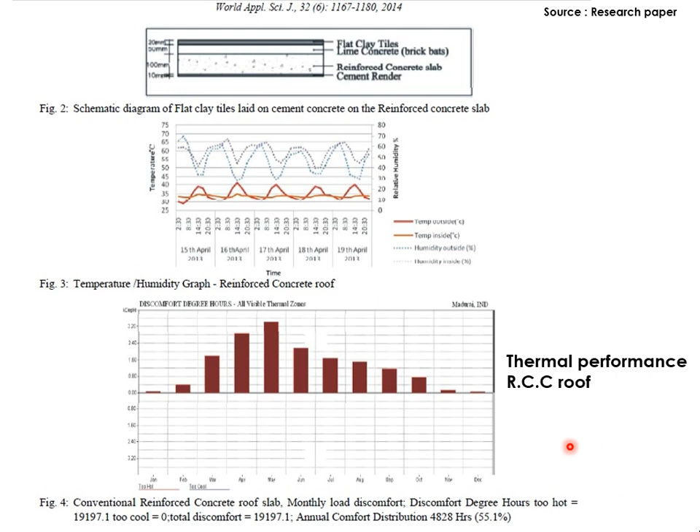So now we have to go through the various roof structures and find out which roof performs better in certain climates, that is, at Madurai.

The second configuration is the Madras terrace roof, a very old type of construction which you should have already encountered during your village study or in your first year. It has a wooden beam, then a wooden rafter, then brickwork or blockwork with lime mortar, then again a small brickwork, finished with a terracotta tile on top. It's a very thick roof.

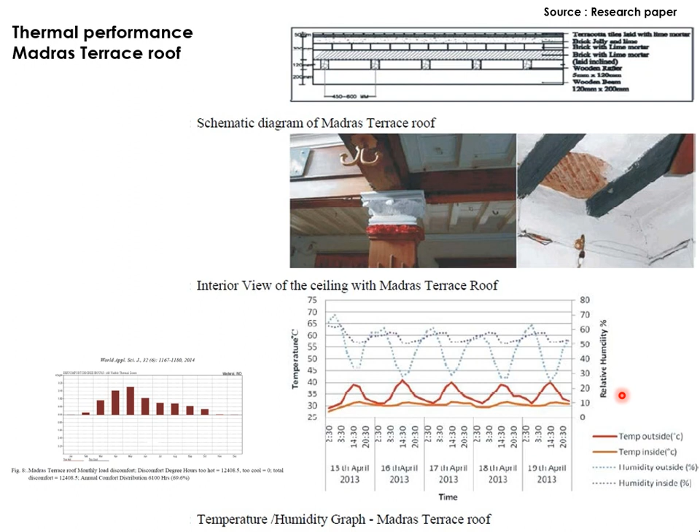The Madras terrace roof also has certain temperature fluctuations because of the exposure to the sun. That is one part you can understand.

The next one is the filler slab. Again, the filler slab is filled with Mangalore tiles - it's an RCC slab, and the bottom of the slab is done with Mangalore tiles. This is the view of the filler slab. So the filler slab is also taken care of, and measurements are taken with this construction too.

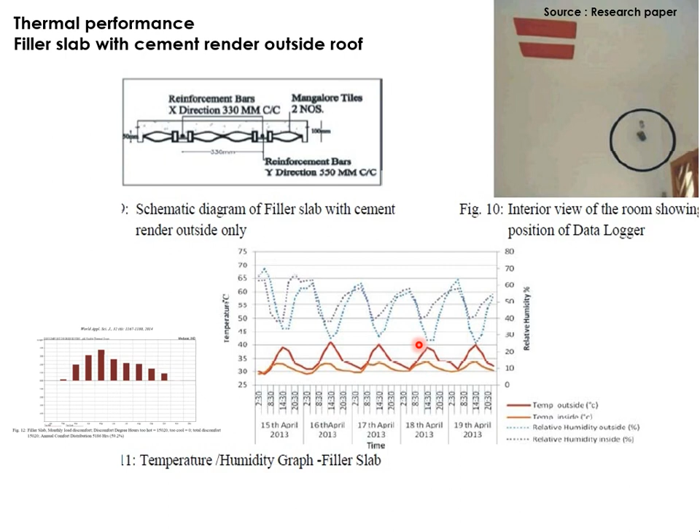We have the thatched roof, one of the oldest roof structures - a vernacular structure where people used to live in thatched houses in villages. So the thatched roof is also considered.

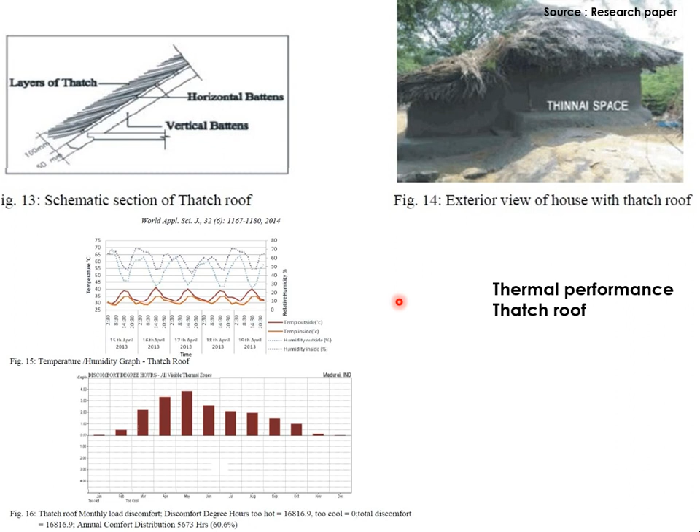Then we have an earthen pot roof, which you are going to be newly exposed to. It's an older type of construction using inverted earthen pots with a hollow section. Because of the earth pot, the heat gain will be a little lesser, and it will be very effective during summers since it is on the roof. After this, it is actually covered - the earthen pots are covered.

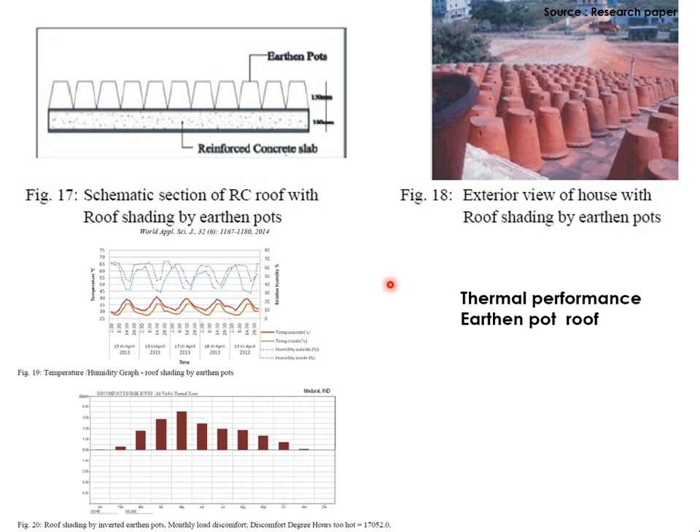You can see what type of results or temperature fluctuations are seen because of this roof structure. Then we have another, slightly inclined roof, the Mangalore tile roof, which is also a vernacular structure, and it is also considered.

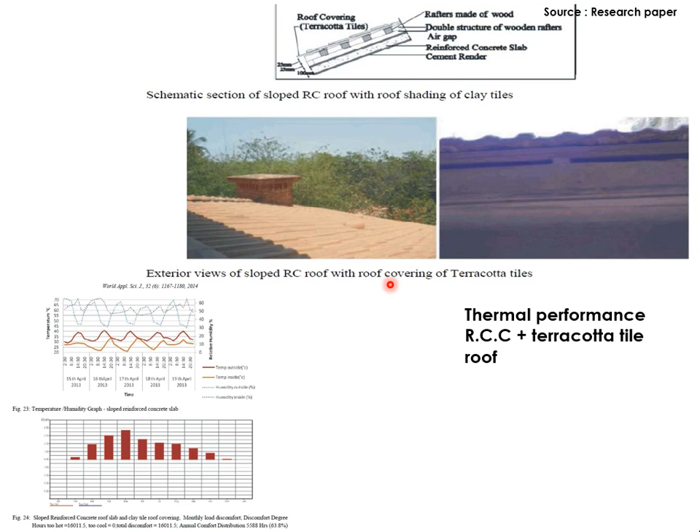Taking the overall picture, you can understand the temperature fluctuations or temperature minimization inside the building because of these roof structures. The blue dotted line represents the outside air temperature.

The outside air temperature from 15th April to 19th April is almost touching 38 degrees, one day touching 42 degrees, another going to touch something like 40 degrees. So the air temperature is extremely high, and we have to understand what is the air temperature inside the building.

When you come inside the building, the roof is going to give you results of heat reduction or heat gain. If you see the RCC roof, the flat roof which we use, called reinforced concrete roof, it is not performing very nicely. During the daytime it's almost 35 degrees Celsius, but during the night time also there is heat gain because it has already gained the heat.

So you can see the fluctuations here. In the daytime it is reducing, but at night the temperature inside the room is not reduced because of the RCC structure.

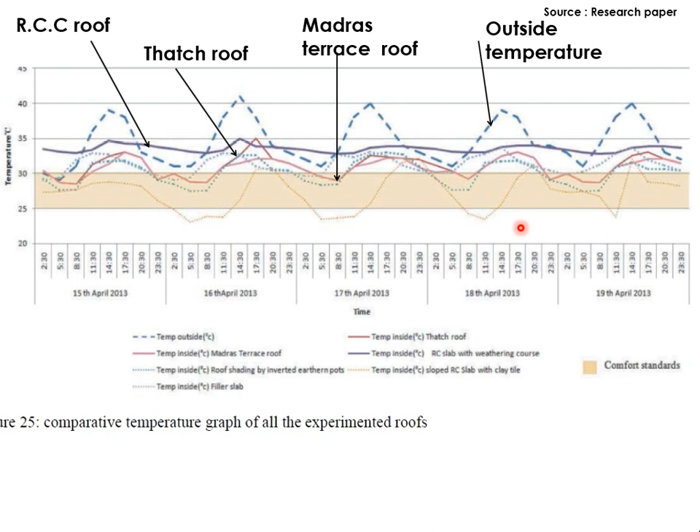The next thing is the filler slab, which is also performing very nicely, better than all the other structures. These roof configurations have been studied by certain researchers, and we understand that the filler slab, or the sloped RCC slab with clay tile, is also performing better. So this is a perfect comparison of how the roof structure can be an identity to reduce thermal comfort gain.

The next thing is glass, a very important element in a building. We know the wall is important, the roof is important, and then we have the fenestrations, the window openings. There is a lot of opening in the building to get daylight, but the same openings become a contributing factor for heat gain because of the glazing structure.

With glazing, we generally have clear glass recommended in residential sections. We have short wave radiation, called solar radiation. Some amount of heat is reflected, some is transmitted inside the building, and some is absorbed by the glass structure.

So this is outside the building, this is inside the building. Heat is reflected, heat is transmitted, and heat is also absorbed. So we have it as A plus R plus T is equal to 1.

We saw in the previous chapter the absorptivity and reflectivity of any material, so A plus R is equal to 1. Now in the glass we have A plus R plus T is equal to 1. So a part of it is reflected, part of it is absorbed, etc. And the whole gain of heat depends on the roof and also the glass material.

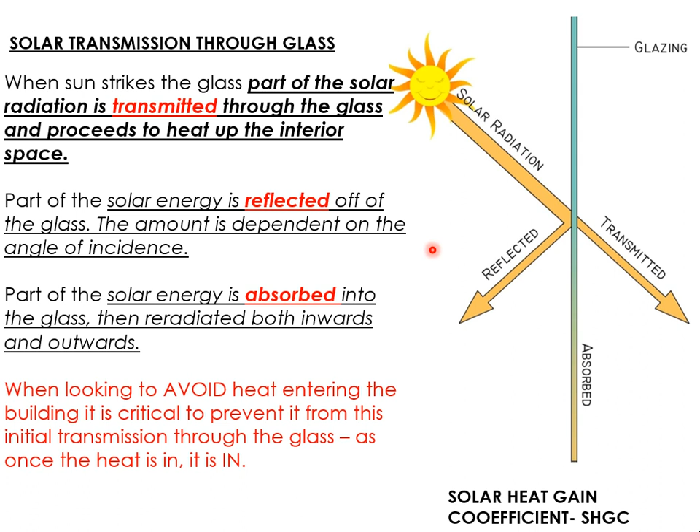So we have three types of glasses: one is clear glass, one is heat absorbing glass, and we have reflective glass. Of course, there are a lot of modules of glass, like a curtain wall section, double wall, double glass, triple pane glass, and some kind of low emissivity glass, etc. In the forthcoming chapters, you can read about those glass sections.

If you have a clear glass, generally we use clear glass in most residential sections. For clear glass, almost 8% is reflected, and 87% of heat is transmitted. For the heat absorbing glass, 43% of heat is transmitted and 8% is reflected. For the reflective glass, also called tinted glass, we have 34% reflected and 30% transmitted.

According to the glass thickness, the glass property, and the tint or color of the glass, the heat absorption varies. So if you see, the heat gain is very high in clear glass. When you recommend a clear glass, it's better to recommend it along with shading elements, etc. That is very important.

Then we have the heat gain which is lesser in the heat absorbing glass, and the heat gain is very less in reflective glass. But the disadvantage is the light level becomes a little lesser because of the reflective coating. So we have to consider the location we are proposing, the type of room, and whether we need more daylight or more heat gain, and accordingly we can propose the glass type.

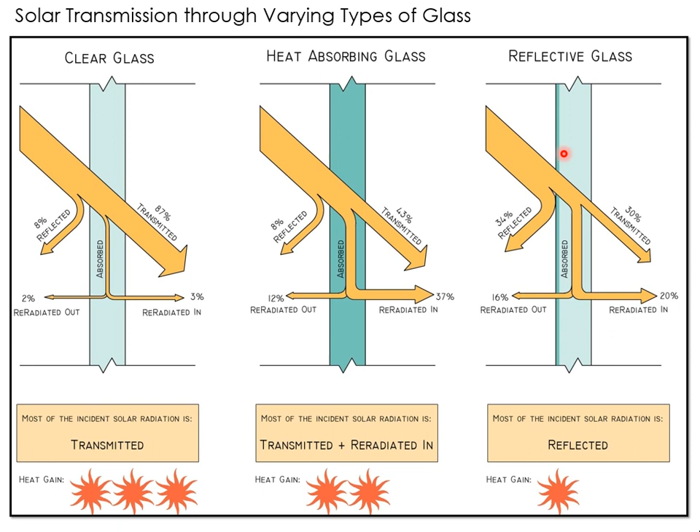So we can see in the forthcoming chapters about the design proposals according to the climates.

Next is the shading strategies, which is very important. According to the hemisphere and latitude, we must know how the sun path is, and accordingly we have to recommend the shading. Shading strategies can be recommended on the wall, on the roof sections, etc. We will understand about these one by one.

Generally we are in the northern hemisphere, so we consider the northern hemispherical sections. The sun path is from east to west along the south, so it's tilted along the south. During December or winter season, the sun is almost inclined to 12 to 20 degrees, so you get more exposure to the southern wall. During summer, the sun is almost at zenith angle, so you get more exposure to the roof section.

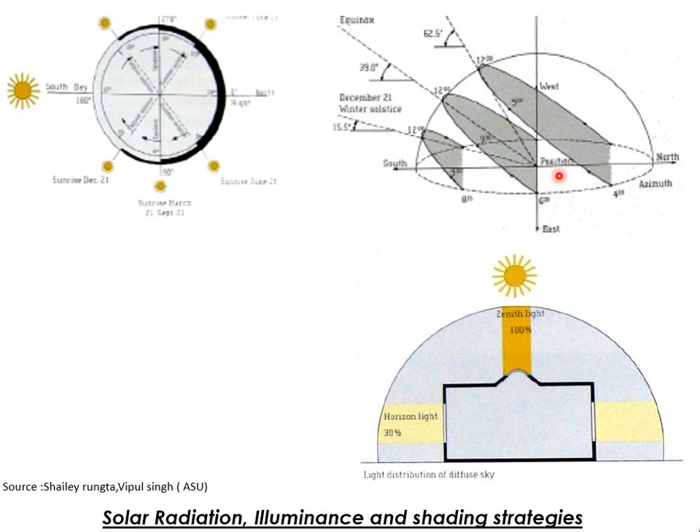For a northern hemisphere, something like Tamil Nadu or New Delhi or anywhere in the northern hemisphere - during winter sun, for example during December, January, or November, December and January, your sun is inclined towards the south. So your southern facade is actually more exposed. You must understand how to protect your southern facade or how to gain heat from it if it's a very cold climate.

The facade is more exposed and the roof is exposed too, but in a diffused manner. That is important during December, January. When you come to April, May and June, your sun is almost at the topmost level, not very inclined, it is on top. So your roof exposure is very high during summer.

So your roof must be very highly protected during your summer time. So we saw in the previous slides of roof configurations why the roof configuration was concentrated on Madurai. Because Madurai, of course, we know it's almost at 10 degrees north, so your roof is more exposed during your summer. So the main concentration on the roof is also considered. So your roof is very highly exposed during your summer.

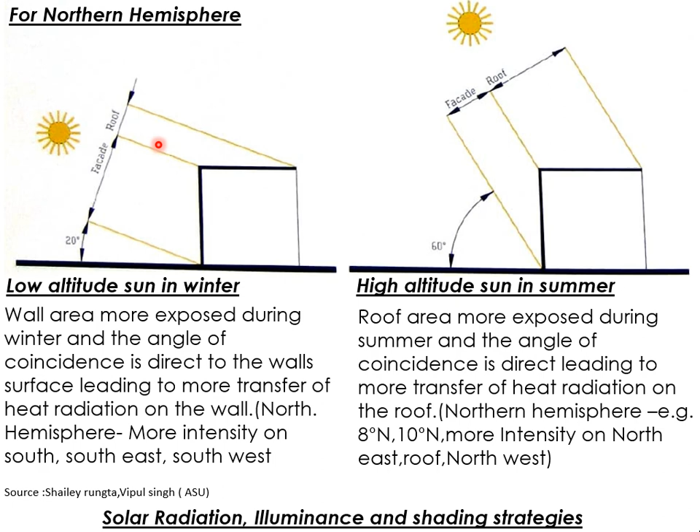So we have to know how you can propose design strategies for the roof and also for the walls according to the latitude. So that is one thing which is important. We have design solutions to reduce solar radiation. Of course, we know it's called horizontal overhangs or just a sunshade. So this is a very common sunshade which is used in all the buildings. We have to understand how these things can be different, or can be used in a little bit of a different type, according to the latitudes, and how to reduce the solar radiation.

So we have horizontal overhangs, we have louvers, we have horizontal louvers. So it's like horizontal louvers, which is almost like a pergola. We have vertical louvers. So for vertical louvers, the recommendation is on east and west because it's a low angle sun. So vertical louvers are recommended on the east and western facade, whereas the horizontal overhangs are recommended on the southern facade because it's an overhead sun. So the horizontal louvers are recommended. Maybe you have inclined horizontal louvers, because if your sun angle is very low, you can have horizontal louvers which are very inclined.

We may have egg-crate devices where the sun angle is lower and also it is very harsh, so we have to protect the building. Or if it's public spaces where you need more shading, you can go for egg-crate shades, where the typical example is your Chandigarh complex. So you can actually see some of the egg-crate devices which are built in the Chandigarh complex, which is designed by Le Corbusier.

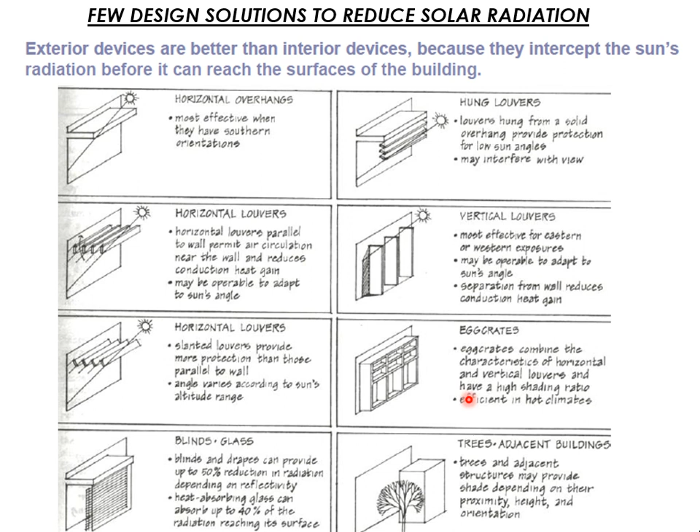We have the blinds and glasses, and we have also the trees and adjacent buildings. So now the main consideration itself is the built structure. So how you can reduce the heat gain by your shading techniques in your built structure. Finally, after your built structure, of course you have the option of keeping your trees, vegetation, etc. Of course this option is also according to the space which is already available. So that is how we have to know a few design solutions to reduce solar radiation.

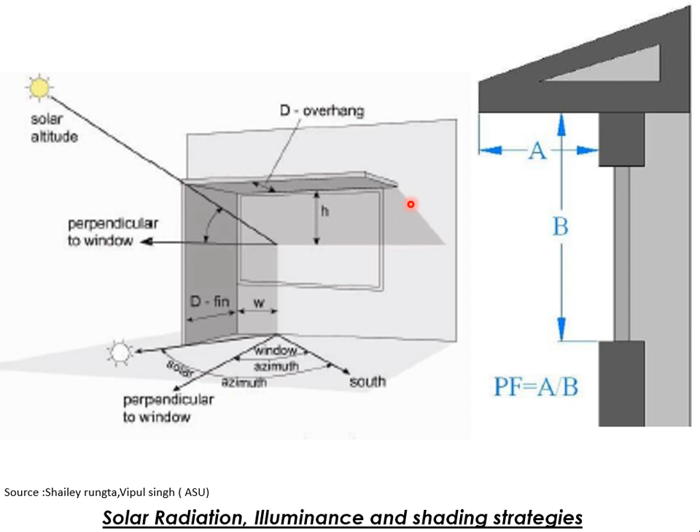Then of course we have some technical terms to calculate the sun shades and calculate the projection factors, etc., according to the length of the window and according to the height of the window. So according to the length and height of the window, we try to project the overhangs. We also have the proposal of the vertical fins, etc. So we have a formula called the projection factor, which you can go through from the books.

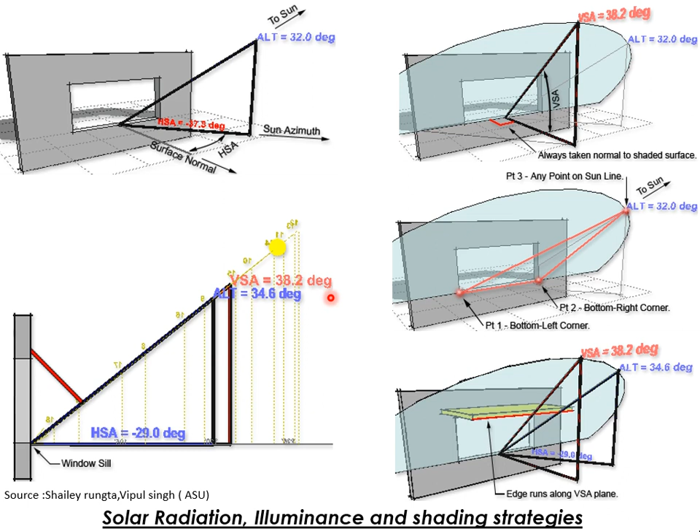So we have 2 or 3 angles, which are called the vertical shadow angle, VSA, and the horizontal shadow angle, etc. So according to the horizontal shadow angle and the vertical shadow angle, there is the proposal of the shading devices, whether it can be an inclined device, a straight device, blinds or something like louvers. So it depends on the length and height of the window. So shading strategies will differ accordingly, and also according to the sun path, sun movement and sun's inclination.

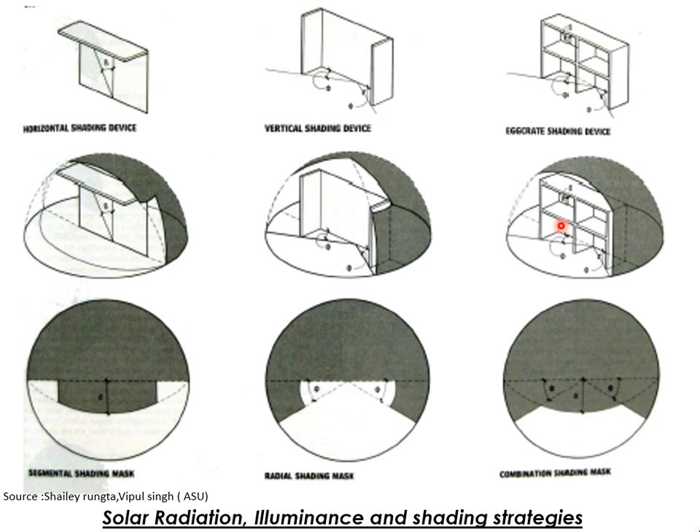If you take 2 lines like that, then the shading is more on this side and this side. Here it is a little lesser, but here you will get a little bit of shading during the summers. So if you have an egg-crate device, the whole thing is shaded, so it is more effective. So that shading also can be studied. Of course, for every shading device the shading masks are calculated.

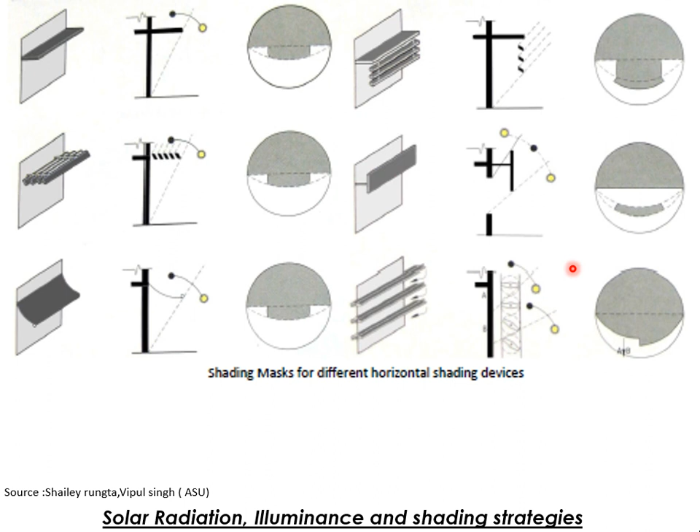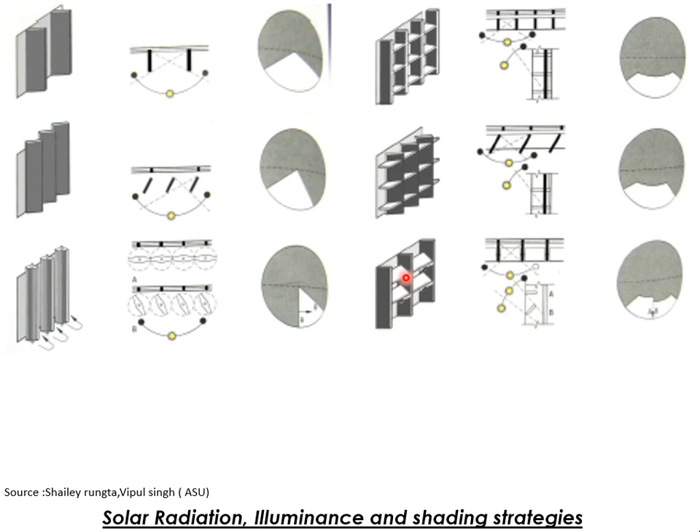So this is very effective because it is actually protecting from the top sun, and it is also protecting from the inclined sun, etc. So again, these shading devices are very, very effective. So there are a lot of various shading devices which you can study and recommend accordingly. So again, we have vertical devices. Some of the shading masks you can see, egg-crate devices and egg-crate devices with inclined horizontal devices, etc.

So we end this chapter. We have a few things to remember, some abbreviations or formulas for the forthcoming chapters. So we must understand about LEED. LEED is Leadership in Energy and Environmental Design. We have certain bodies which give you recommendations to design climate responsive buildings. So we have LEED, and we have LEED India, those are the ratings for India. We have GRIHA, called Green Rating for Integrated Habitat Assessment. So that's again a rating.

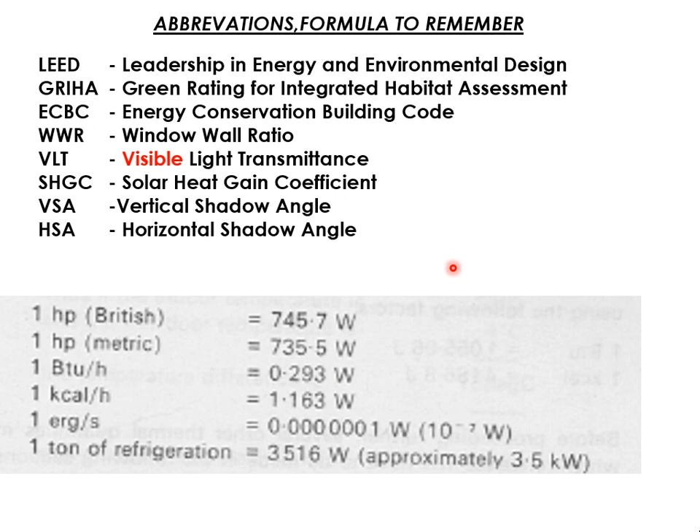We have ECBC, Energy Conservation Building Code. We have WWR, we will see it in the next chapter. Just remember what the short abbreviations are. We have VLT, Visible Light Transmittance. We have SHGC, Solar Heat Gain Coefficient. We will see them in the next chapter. VSA, as we saw in the previous slide, is Vertical Shadow Angle. HSA is Horizontal Shadow Angle. We have some kind of formulas which you must remember. So we have 1 HP, or 1 BTU, British thermal unit, so we have to know how to convert it into watts, etc., when you do an energy calculation.

So a few references, as we told in the last chapter also. Please go through these books, they are very good for references. The best book to start with is Arvind Krishan's Climate Responsive Architecture, which can give you a lot of details about the landforms, how the climatic variations are there due to a lot of external features, and it gives you a lot of calculations also. That's the first book you can go through. It's very easy and convenient to learn, in very simple language.

The next very effective book is Manual of Tropical Housing and Building, which is very nicely written with practical examples, and very technical also. The other books are a little bit sophisticated, and you can also go through them accordingly. And if you have to know about technical items like heat transfer, what the formula is, and for glass sections, what the formula is, the Introduction to Architectural Science will give you all the technical aspects. So we end with these references.

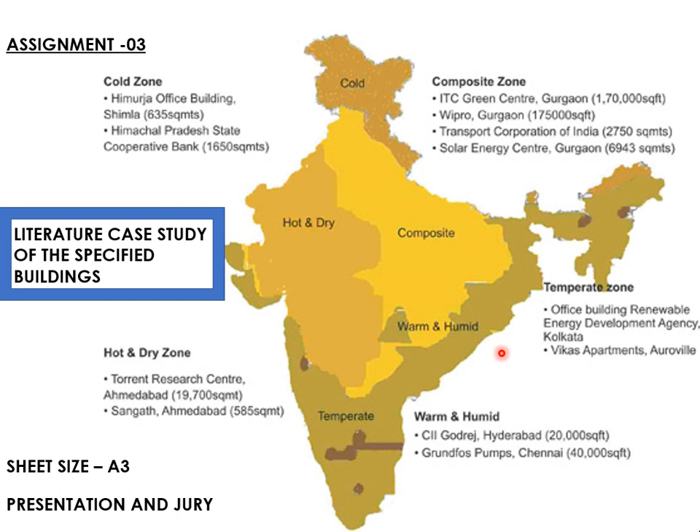So we have some assignments which you can do in the later stages. We have 5 climatic zones. We have to do a small case study of each climatic zone, taking an already built building from each zone. It can be a commercial space or even residential. We try to understand how the architects or designers gave a design proposal and executed it, and how the building withstands the proposed climate.

We certainly have the question bank. You can go through this question bank for your future exams and for the assignments. We have to know how to draw the stereographic drawing. You can go through it in a book called Heating, Cooling and Lighting by Norbert Lechner. It is available as a web PDF. So please go through and see how the stereographic sunpath drawings vary according to each latitude and longitude. That is one thing which is very important.

Thank you so much. So we end this session and we will continue with the next session on daylighting.